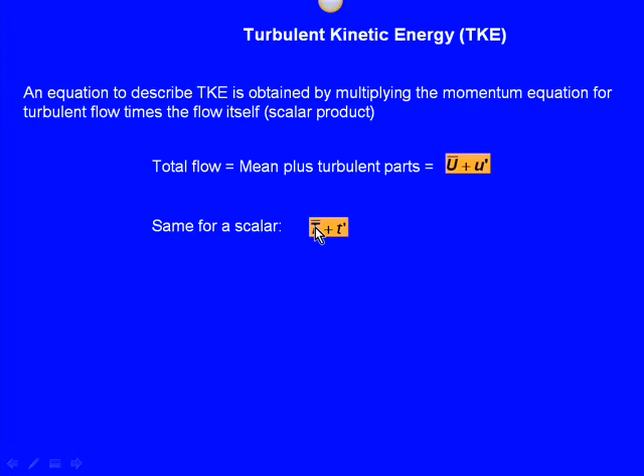In order to do that, you need to define a total flow that has a mean plus a turbulent part. We're going to denote the mean part as capital U and the fluctuating part as lowercase. And the same for a scalar like temperature, salinity, density, or any concentration that we can define in terms of a mean plus a turbulent part. How does that look like? What does that look like?

Well, pretend that this is a record where you have hours, a record of temperature with hours on the x-axis and temperature on the y-axis. You measure it as fast as you can with the instrument you have, in such a way that you get all the fluctuations. Some of those fluctuations are noise, but some are turbulent fluctuations, as denoted by the blue line here.

So the signal can be represented by a mean component, which is the red line shown here, the mean temperature, plus the fluctuations, which are the deviations from the mean - so all those deviations, positive and negative. So the average in time of the red line is the red line itself - the average of a mean is the mean itself.

The average of the fluctuations, however, the average in time of the fluctuations - if we average all the fluctuations over this span of time, you're going to see that all the positives are balanced by all the negatives, so the average of the fluctuations in time equals zero. Similarly, the product of the mean times the fluctuations equals zero, because the fluctuations are positive and negative.

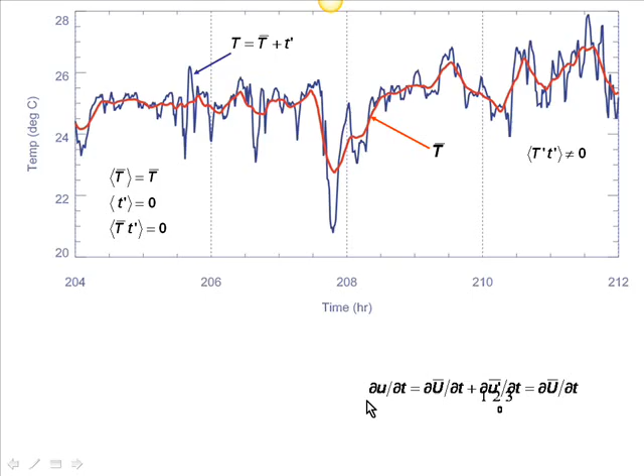So if we use this representation in the equation of motion, or in the Navier-Stokes equations. The Navier-Stokes equations are for laminar flows, if you remember, that use the viscosity of the fluid. So these are laminar. The Navier-Stokes equations are for laminar flows.

For turbulent flows, we take this definition and put them in the Navier-Stokes equations. And the only terms that have products of fluctuations are the advective terms. All other terms remain the same. Like, for example, the local acceleration gives us the local acceleration of the mean part plus the acceleration of the fluctuating part. But this part is supposed to be zero, so this term is 0. So this term becomes that term. So where the trick arises is in the advective terms.

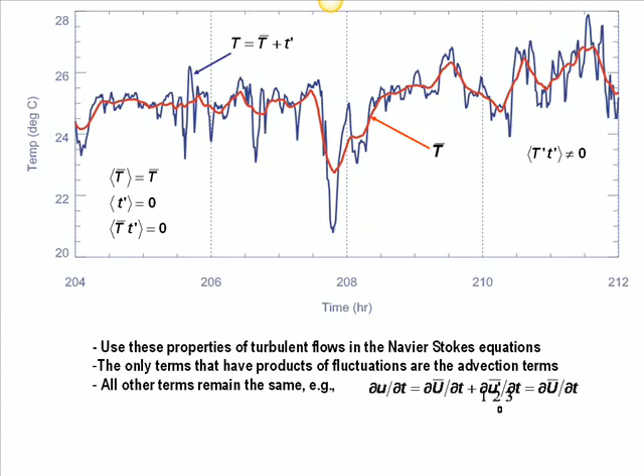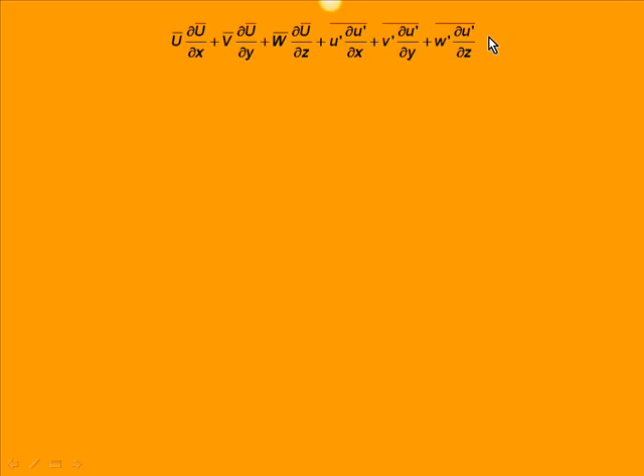I mentioned it before. So the advective terms with its mean and fluctuating part can be expressed like that. There's the mean and the fluctuating part. All other combinations are equal to 0. And this term combined with the local acceleration becomes the total acceleration. And this term can be written like that, like the product of u prime, u prime.

Is that possible? I'll show you why is that possible. Because these terms are u prime du prime plus v prime du prime plus w prime du prime plus the other combination: u prime du prime plus u prime dv prime plus u prime dw prime. So the combination of this product equals this.

But notice what does this have that you can identify? These three terms look like what? Yeah, those three terms look like the continuity equation. So that equals 0. So this term, which is the same as this one, is equivalent to that.

And now, what does this product tell us? This u prime, and u prime v prime, and u prime w prime. What do they tell us? Does everybody know what those are? The Reynolds stresses, right? Those are the Reynolds stresses. And what do they represent physically?

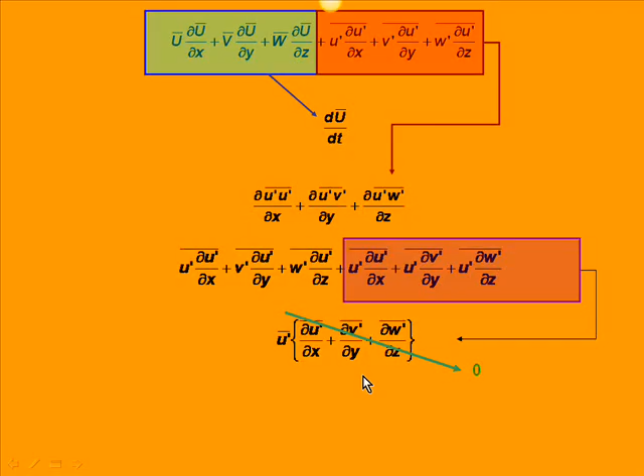Unfortunately, we couldn't record that. So u prime v prime, u prime w prime are the Reynolds stresses. Okay, so keep this in mind because these are the terms in the momentum equation that we struggle with, right? We don't know what these are, or do we?

Maybe we are little by little making strides, small strides to know what they are, because we can do now direct numerical simulations and large eddy simulations, as they're called, in which the equations of motion, including the Reynolds stresses, are solved directly. So for that, you need very small time steps. So you can't go very far in time, unfortunately. So in a decade, we'll be able to do it, I think, as the computer power gets us there, so that we can resolve very small scales over a long time.

I mean, a couple of days, or 3 days, or 4 days. That would be a long time, because right now we're able to resolve these. Well, maybe we're already, I don't know. I'm not an expert on that, but we are starting to be able to resolve, at least over short periods of time, the full sets of equations.

Now, why is there a problem with these stresses? Why is it that we don't know what they are? Does anybody know? Because we've added variables to our set of equations. Remember our three equations of motion and our continuity equation? Our three equations of motion have U, V, W and pressure, and what else do we have as variables? U, V, W, pressure, density. So we have maybe five variables with 4 equations right there.

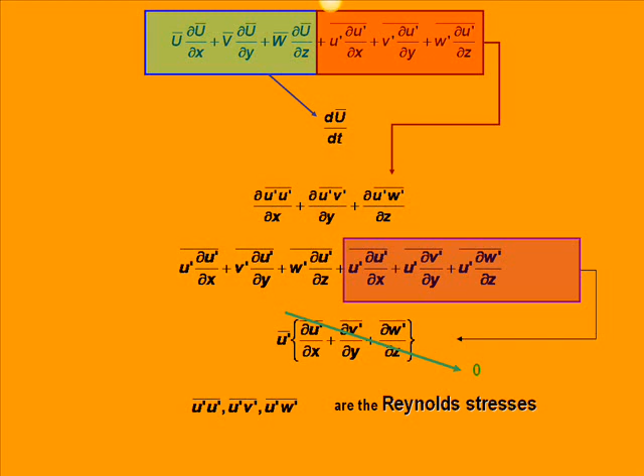Well, there are different ways, so we're going to get there.

So in order to be able to see how we can parameterize those Reynolds stresses, let's look at the turbulent kinetic energy equation. It's the equation for turbulent flow multiplied times U, and now we're dropping the primes. So all the lowercase letters will mean turbulent quantities in this representation, and the capitals will represent the mean flow. By the mean, I mean averages over 10 minutes or 5 minutes, whatever period we choose. And turbulence is over periods of a few seconds.

That's what we get by multiplying our momentum equation, including a mean plus a fluctuating part, that is a mean plus a turbulent flow, times a turbulent flow. So we get this equation. Do you know what these terms represent? Let's see. First, the lowercase e sub ij represents the strain rate, meaning how the flow is sheared laterally and vertically. Remember, ij is a sum convention.

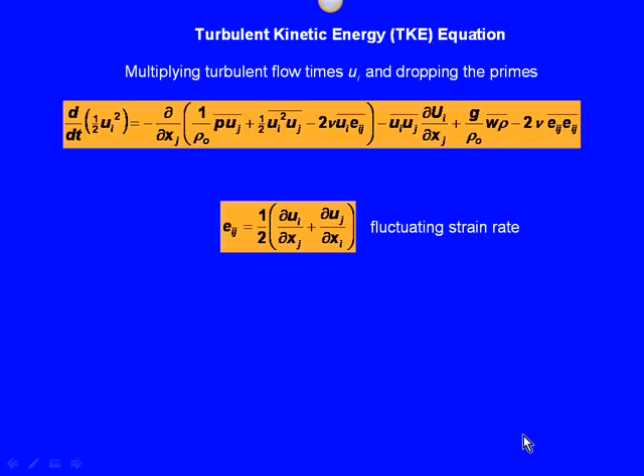The left-hand term of the equation represents the total change of turbulent kinetic energy. Why is it turbulent kinetic energy? Kinetic energy equals one-half of mass times velocity squared, so this is turbulent kinetic energy per unit mass. Remember, the lowercase flows we're representing here are turbulent. So that's the total change of turbulent kinetic energy per unit mass.

The next term represents transport of turbulent kinetic energy. It's transport because it has a divergence on the left-hand side, so the gradient of that quantity in parentheses is transport. This is transport of kinetic energy produced by pressure fluctuations, like waves, and this is by the advection of kinetic energy. And this, notice, has the viscosity of the fluid, so this is the transport of dissipation - I'll explain that in a second.

The next one, which is very important, is the production of turbulence by the shear flow, by the mean shear flow. Notice it's the interaction of the Reynolds stresses - the Reynolds stresses are u of i, u of j - multiplied times the gradients in the mean flow. That's called the shear production term, the production of turbulence by shears in the flow - how turbulence gets produced because of the shears of the flow.

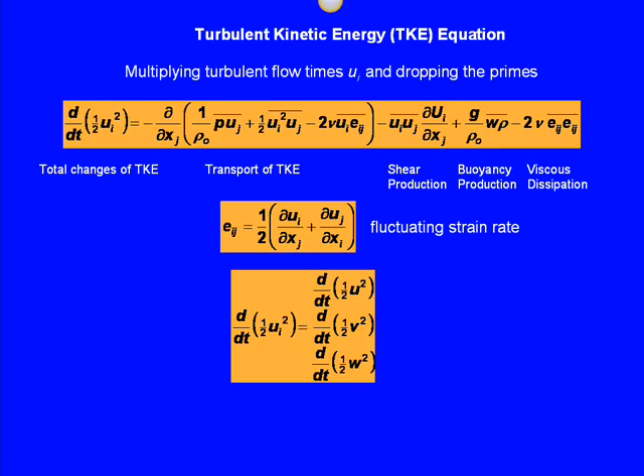So let's look at each one. The first term can be represented for the three components of energy like that, just so we remember what the sub-index notation represents.

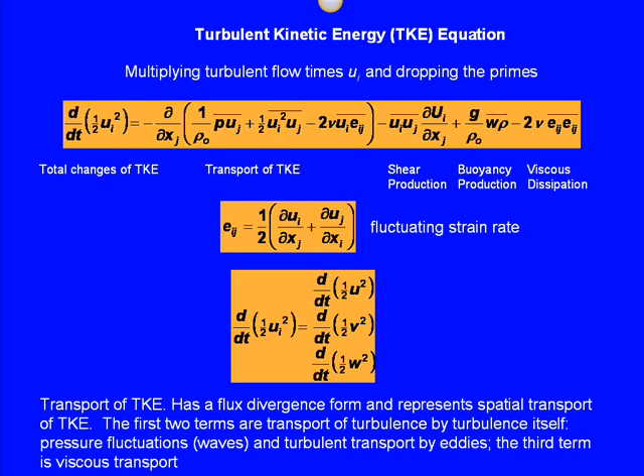The next term is the transport of turbulent kinetic energy, which has a flux divergence form - partial over partial x of j. That's the flux divergence form, and it represents a spatial transport of turbulent kinetic energy. Notice the first two terms are transport of turbulence by turbulence itself, that is pressure fluctuations - this is turbulence caused by waves - and turbulent transport by eddies. So think of a river and how the current transports eddies - that's this term here, a current transporting an eddy. Then the third term would be a viscous transport - the current transporting a viscous effect.

So what term is that? We said shear production. So it's the interaction of the Reynolds stresses, as you saw here—these are the Reynolds stresses interacting with the mean shear. So this here is only one of the three components of this shear production term. It represents a gain of turbulent kinetic energy.

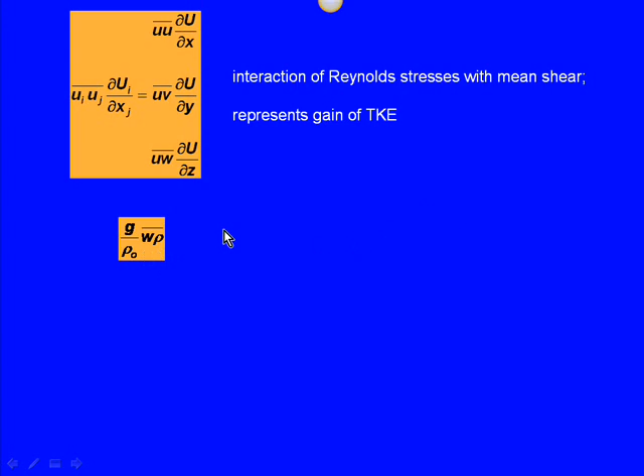This is a term that only produces kinetic energy. Then we have this that's called buoyancy production. It represents gain or loss of turbulent kinetic energy, and it depends on the covariance of the vertical flow with the density. So if the flow is in that direction, then you might have negative buoyancy, so production of turbulence.

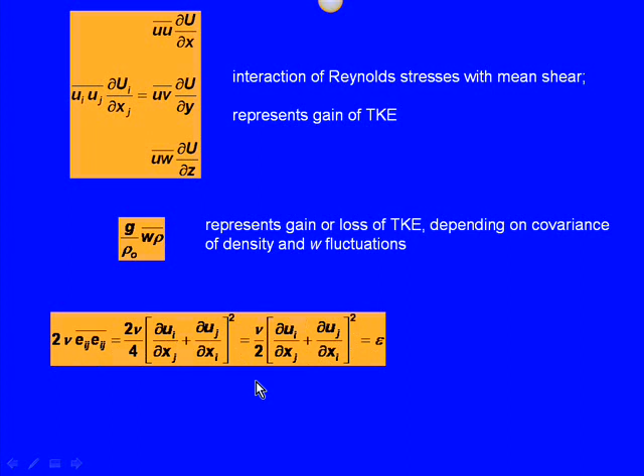And then we have here—what was this term? The dissipation term. Notice, this is the general way of expressing that term, because this e sub ij, if you remember, is dui/dxj plus duj/dxi. So the strain rate, 1/2 of the strain rate, is what this is. That's where the 4 comes from. So the dissipation rate is given by this expression, and it always represents a loss of turbulent kinetic energy.

So in many applications, this is an assumption that you take. In estuaries, people are using this simplification to try to study turbulence. So what is the balance? What are we assuming here, and what are we neglecting, if we have this?

So there's no changes in time and no transport of turbulence. So we're looking at one location in the estuary, and we're assuming that there's no transport of turbulence. So we have the balance between what and what and what. The turbulent kinetic energy balance consists of production of turbulence by buoyancy and by shear, and that turbulence is destroyed by dissipation, which is the epsilon.

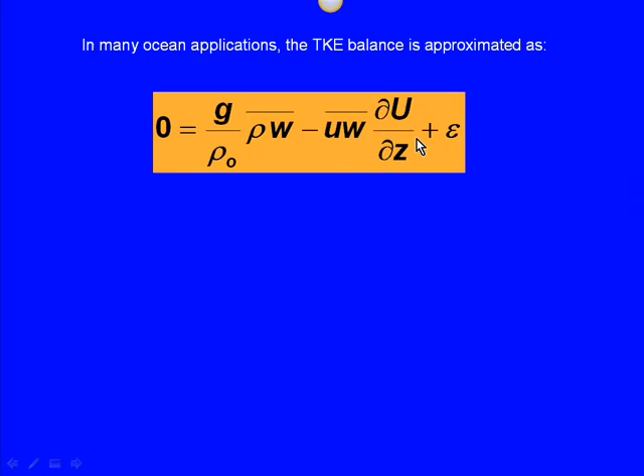Can we measure this term? This is a frontier topic, because the challenge is to measure these terms, and people have been trying for maybe three decades now. The one that they've measured usually is this one, and maybe they're able to measure this one. A little problematic has been this one, but now with the ADCP we can measure this one. So we're getting there—I'll show you in a minute how.

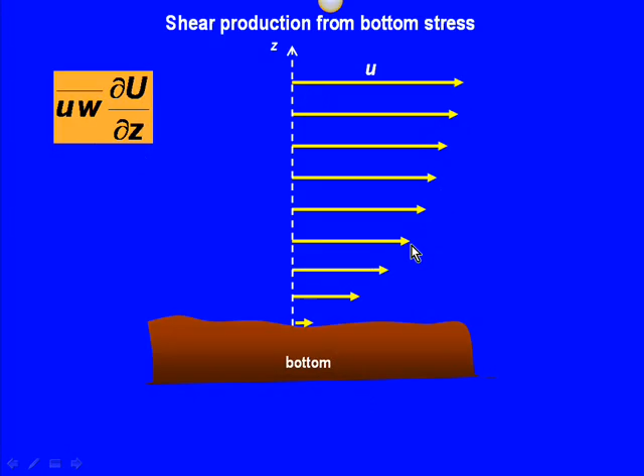So I asked you before, how can we determine these Reynolds stresses? Well, the Reynolds stresses interacting with the vertical shear produce turbulence by the flow interacting from the bottom. So we have shear production from bottom stress. We have also shear production from the wind stress, right, that causes stress at the surface of the water—this is the air, this is the water.

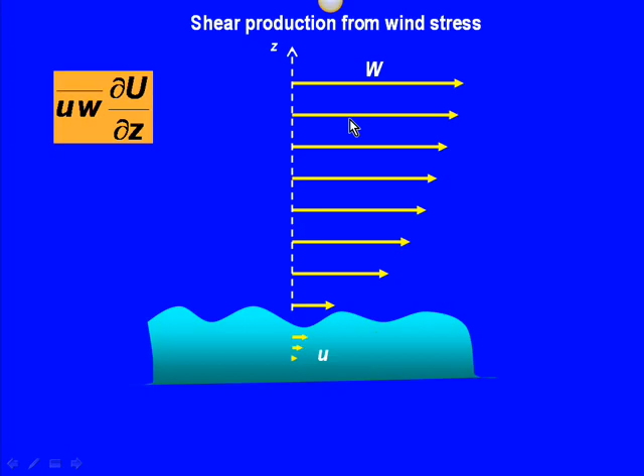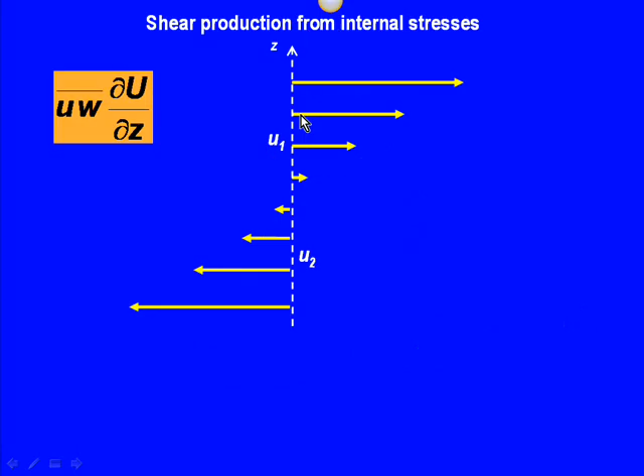And we have shear production from internal stresses also. So this would be in the interior of the water column, flows going in opposite directions, so that's a large vertical shear, dU/dz, large dU/dz here. So there's a flux of momentum from regions of fast flow to regions of slow flow.

How can we parameterize the shear production? The shear production only needs the parameterization of the Reynolds stresses, right? In order to be able to determine how large the turbulent shear production is, we need to determine the shear stresses. And one way that we have been doing, traditionally, is through this turbulence closure, as we call it.

This is the turbulence closure that allows us to relate turbulent quantities to mean quantities. So the Reynolds stress equals the vertical shear of the mean flow, and the proportionality constant is given by this coefficient, which is called the eddy viscosity.

So near the bottom, in order to know what these Reynolds stresses can be, we can assume that near the bottom we can use this expression. This expression is what you've seen in your fluid mechanics class—that's the law of the wall. So we can assume that the flow decreases logarithmically as we get closer to the bottom.

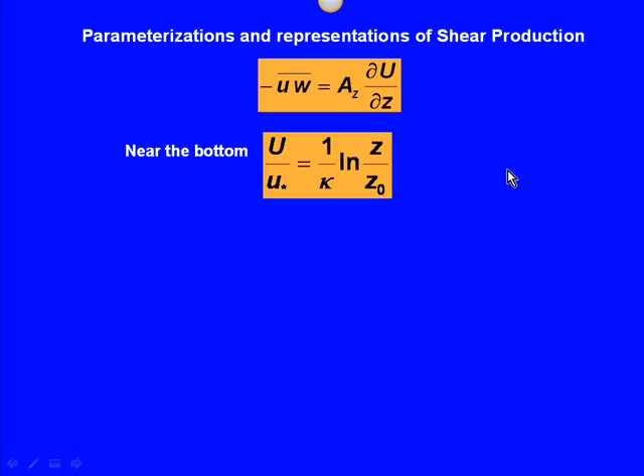So what we do not know in this expression is the roughness length—this has units of length. And we don't know the friction velocity, right? What is this, the von Karman constant that equals 0.4, right? So from this, how can we make the jump from here to the Reynolds stresses? Well, let's see if we can do it.

First, we can get a feel or an estimate of the stress, the friction velocity, from this expression. We know that the bottom stress equals the density of the water times the friction velocity, but it also can be parameterized by this expression where C sub B equals 0.00116.

That's for the air-water interface. We're talking about the water-bottom interface here, 2.5 times 10 to the power minus 3. We'll dispel that notion in a moment, but we tend to use the canonical 2.5 times 10 to the minus 3. So it's a bottom drag coefficient, and this reference velocity is a velocity maybe 1 meter away from the bottom.

So from this, you can calculate the drag coefficient if you know the friction velocity. But how can you determine the friction velocity? Any idea?

If you measure a current profile, like we do with the ADCP, and if you're able to get all the way to the bottom, can you get that friction velocity using the law of the wall? Maybe, right? You'd need to adjust two parameters, these two and these two, and find the best fit between the observations and this law of the wall.

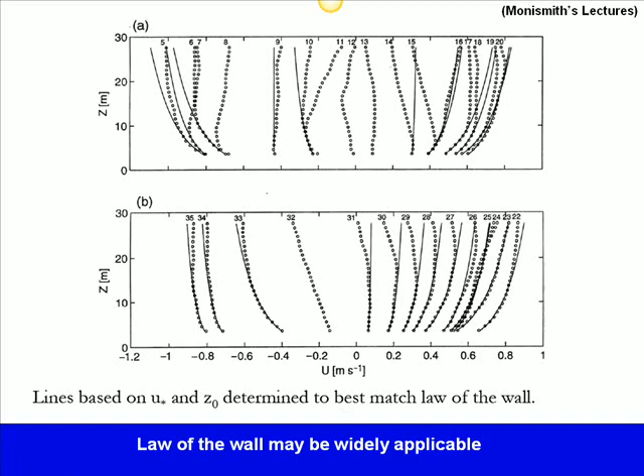Does anybody have any idea what the range of values one should expect for Z sub 0? If I tell you 1 meter, what would you say? Wrong. Too small or too large? Too large, right? So what would you expect to have? 0.1 meters, 10 centimeters? Maybe, but that's a little too large still.

So between 0.1 millimeters and 1 centimeter, that would be the Z naught length scale. And for that range of Z naught, you can obtain the U star from the law of the wall. Once you get the U star, you measure this U reference, you calculate U star by best fitting your observations to the law of the wall, and then you can calculate the drag coefficient.

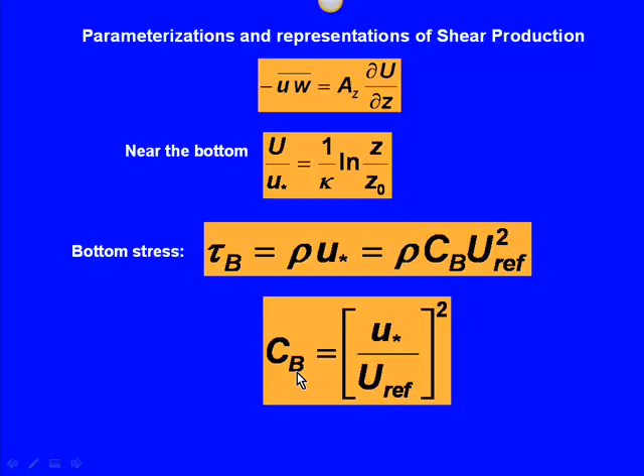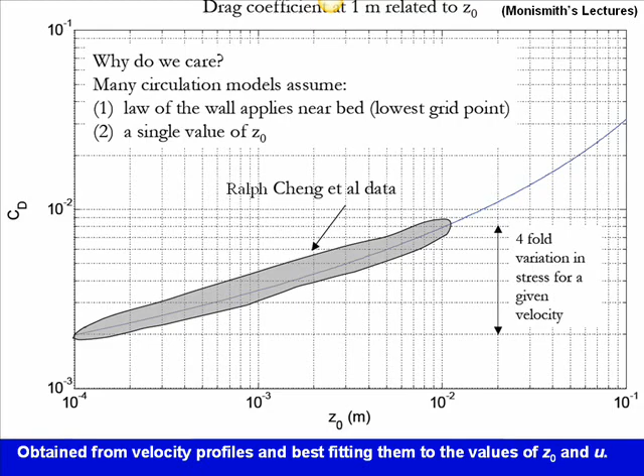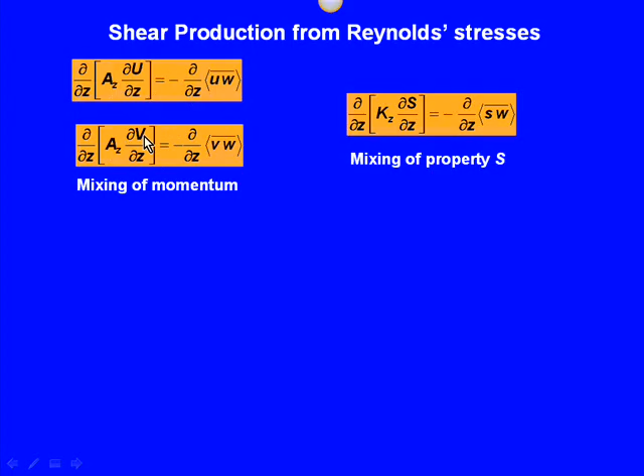So we're making the connection between the Reynolds stresses, seeing how we can parameterize or represent them near the bottom, and we use this parameterization. In the water column, we're able now to measure them with ADCP. Remember these relationships: this is what we used before in numerical models, and this is what we should be using. We couldn't do it because we were adding variables to the problem, but now we're able to measure these terms, U prime and W prime. So from here we'll be able to determine the eddy viscosities, and same with salinities, to determine the eddy diffusivities.

With the ADCP, instead of measuring in geographic coordinates, that is east, west, and vertical, you measure in beam coordinates, in terms of the beam geometry. What you do is calculate the variance of beam 3 minus the variance of beam 4, divided by 4 times sine cosine theta, where theta is the angle of the transducers, which is 20 degrees for the ADCPs we've used. That paper describes how you get from here to there. For the other component, you use the other pair of transducers, U1 and U2. So using beam coordinates rather than geographic coordinates, you're able to measure these Reynolds stresses.

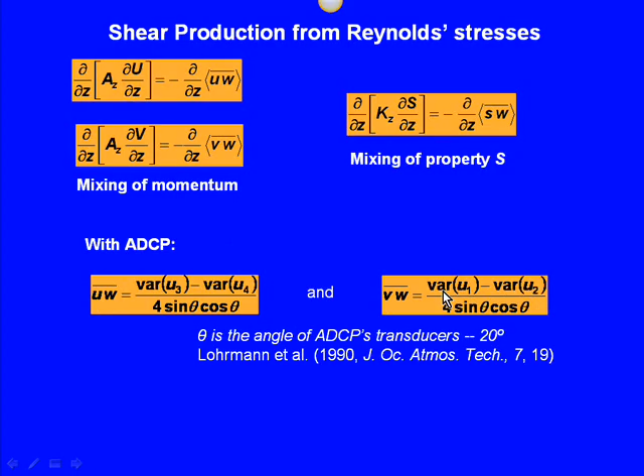Then you can go from there to turbulent kinetic energy production. If you determine that, measuring the mean flow with the vertical shear of the mean flow, and multiply by density, you get the turbulent kinetic energy production. Depending on what units you want, you can use density or not. Then using this relationship, you can determine the eddy viscosities.

So now we're able to measure the Reynolds stresses, and we're able to compare those estimates, calculate the eddy viscosities, and compare those to the ones predicted from turbulence closures used by models.

I don't know, does anybody use turbulence closures in your models? Have you run models that use turbulence closures? Nobody? No? No? Peng has. I think Amy has. No? Yes. Well, anyway...

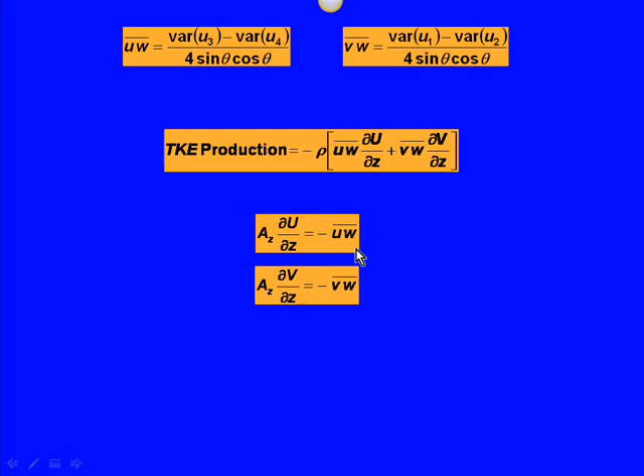So there are turbulence closures that determine these eddy coefficients as a function of the Richardson number usually, and mixing length scales. So now with measurements, we're allowed to see how good those turbulence closures are.

Here's an example of those measurements of the Reynolds stresses. We're looking at a location in the upper Gulf of California, from a paper by Sosa and co-workers. We have distance from the bottom and time, over 2 days, and the 2 components of the Reynolds stresses, the north component and the east component.

Notice here that we have these positive pulses of Reynolds stresses and negative pulses of Reynolds stresses. The main orientation of the stresses is in the north direction here, and in the east direction you can see some also. Positive corresponds with negative east, positive north; negative north corresponds with positive east. Notice how the strongest are near the bottom, so these are bottom stresses, Reynolds stresses from the bottom.

Notice the order of magnitude here. It's around close to 2 times 10 to the minus 4 meters squared per second squared. So these are Reynolds stresses.

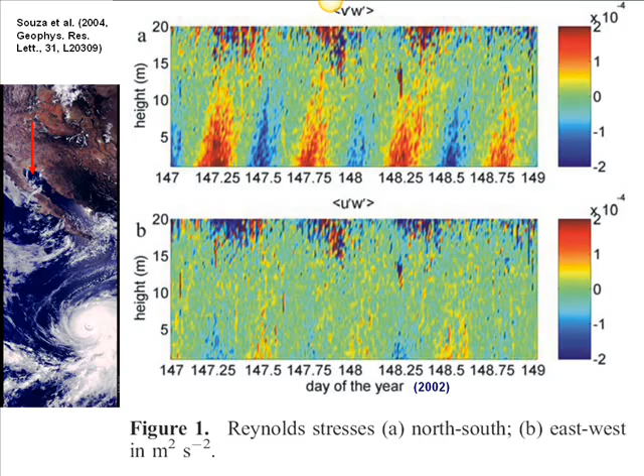Okay, so that's what they would look like, and you can determine Reynolds stresses now. From that, you calculate the turbulent kinetic energy production in watts per cubic meter. Remember how to calculate it? The Reynolds stresses, you multiply them times the vertical shear of the mean flow, DU/DZ, the one you measure with the ADCP, and multiply times density to get those units, watts per cubic meter.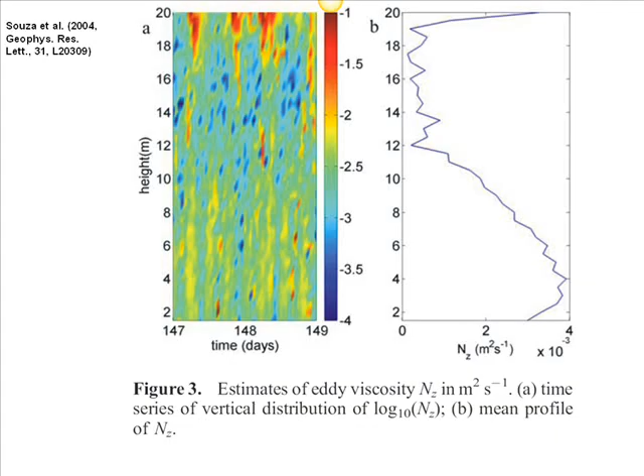So the CGS would be 10... right? Yeah, 30 rather. Order 10, that's 30 centimeters squared per second. So it's within the range that you should expect to see. The range you should expect in meters squared per second would be on average 10 to the minus 5 when you have very weak mixing, to 10 to the minus 2 for strong tidal mixing. That's the order of magnitude of the eddy viscosities, approximately. Would you agree with that, Peng? Yeah. Okay.

So let's now look at how we can determine the shear production. The shear production can be determined from current profile measurements, using the law of the wall to parameterize the bottom stresses, if you cannot measure them directly.

There are some instruments now that allow you to measure a profile all the way to the bottom. ADCPs that use very small beams let you get all the way down. You can also determine the shear production for the entire water column from measurements with regular ADCPs now. That has been a great stride forward in measuring the Reynolds stresses.

Now for buoyancy production, you can measure it directly. All you need to do is measure density and vertical velocities at very small scales in the vertical. That's tricky, measuring vertical velocities reliably, because as you lower an instrument, the instrument itself will be moving. The density you can measure reliably in the vertical if you have high enough spatial resolution, with very high frequency sampling.

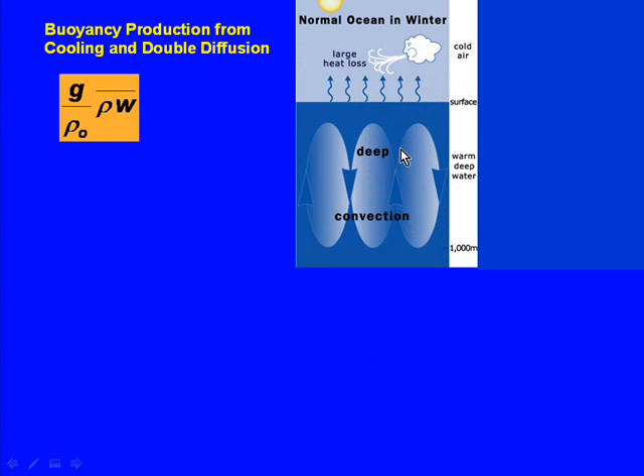Let's look at two processes that can cause buoyancy production: one through cooling, and one through double diffusion. With cooling, cold air sitting over warmer water would cause what's called deep convection. That happens in the fall and winter in the open ocean, and it might look something like this.

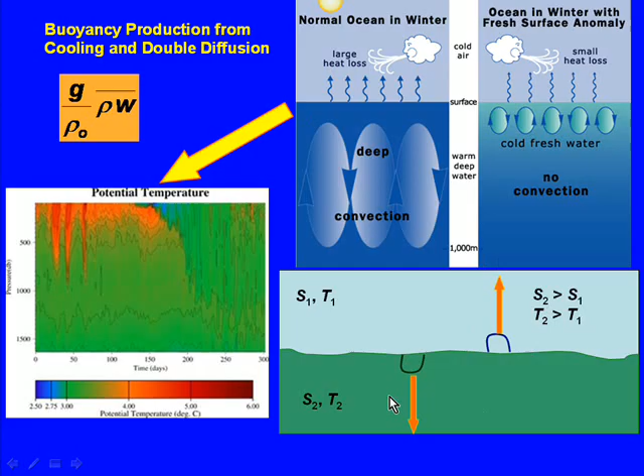and it's lower salinity, where should it go? It should shoot up, right? Like that. And the same here: below the interface, it will get cooler because of the cooler water on top. Through diffusion it will get cooler, and then it'll shoot down. That's what's called double diffusion, because at the interface you get double diffusion mixing.

How long do you think this can go in terms of depth? How far do you think this process can go? This process will go up by how far in terms of depth, do you think? 10 meters, 100 meters, 1,000 meters, 1 meter?

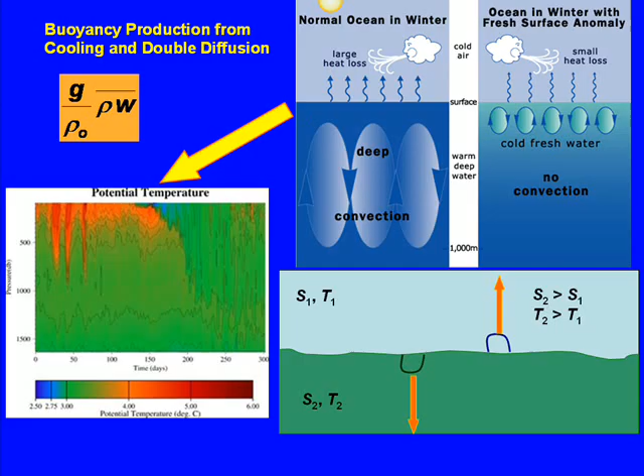10 meters? That's a good guess, and that's typically the case, around 10 meters, so between 1 and 10 meters. So these excursions are not very long, because immediately these parcels of water will find their depth of neutral buoyancy. But imagine this going like that.

I have a simulation, a lab experiment. It's a very nice experiment, I'll show it to you. So let's go back. So what we have here—I don't know, can you see the screen? Not sure whether... oh, there it is.

So this is a tank in a lab, and you have a stratified water column in salinity, and it's being heated from underneath. So as it's heated from underneath...

this is how you start creating this layer here, and the heat is starting to go up and starting to form these other layers. You see? I'm just going to let it go. So the second layer is well formed now, and the third layer is starting to form. And now the third layer is better defined, and the heat's starting to go up to a fourth layer. You see the cells, the small cells, convective cells.

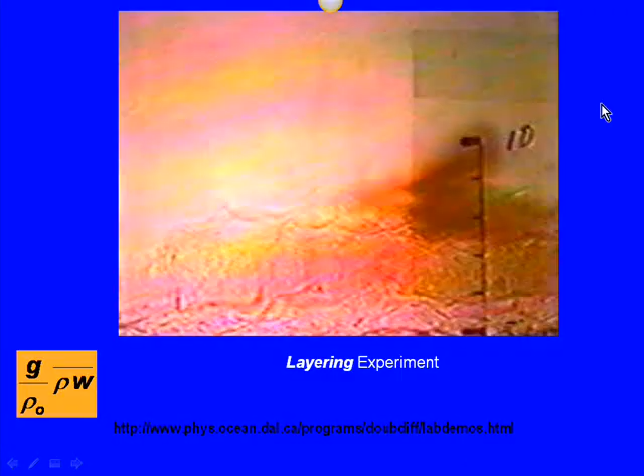So I'm just going to close today by showing you a couple of examples of layering and mixing with data. These are data from the Arctic, and this is a temperature profile here going from 150 meters to 250 meters—only 100 meters of the profile, but this follows the trend to the surface. Notice the values: it's minus 1.5 here, minus 1. These are degrees Celsius. Why isn't it frozen?

Why isn't the water frozen? Pressure at that depth is not that important. How about salinity? Yeah, so salinity—the freezing point decreases as salinity increases. So that's why it's not frozen.

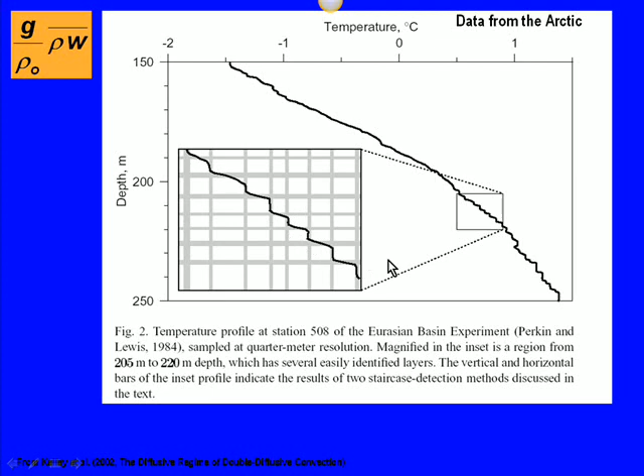So anyway, you see this trend of temperature increasing with depth, and in this window of approximately 20 or 15 meters you see this staircase distribution of the profile. These are the layers mixed by double diffusion, and look at the interface—these layers are like 2 or 3 meters deep. So that's through the process of double diffusion.

Then in a fjord in Chile, right here, there's the inland sea of Chile—all this is land—and we're looking at this small fjord here, and at salinity at different times. You see this staircase distribution of salinity, where the layers again are like 2 or 3 meters. So you see it's more or less mixed here, then the interface, then more or less mixed, then the interface.

So again, you can have buoyancy production from this double diffusive process. That happens when you have a system with high salinity warm water underneath low salinity cool water, and that has to be in a place where the currents are weak. Because if the currents are strong, shear production would dominate the mixing rather than this double diffusive layering.

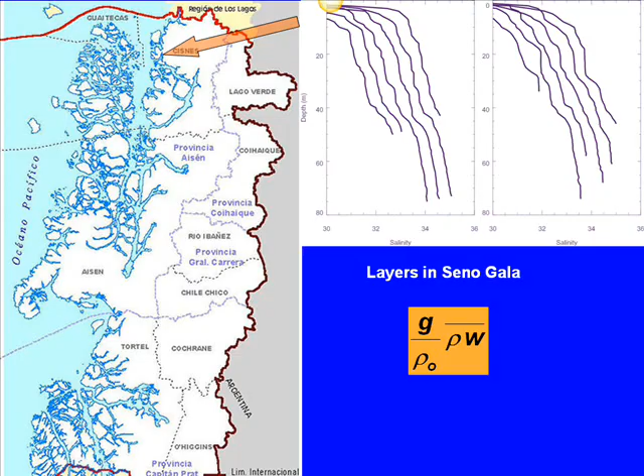Okay, so we'll stop right there, and we'll start talking about dissipation and how to measure dissipation next time.